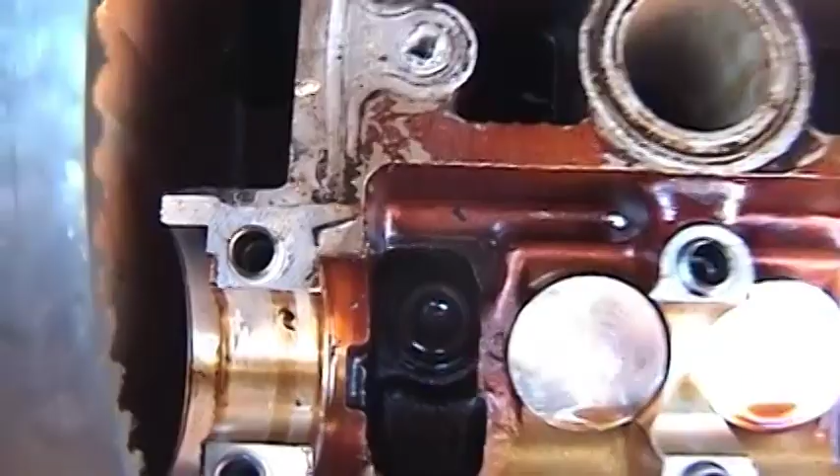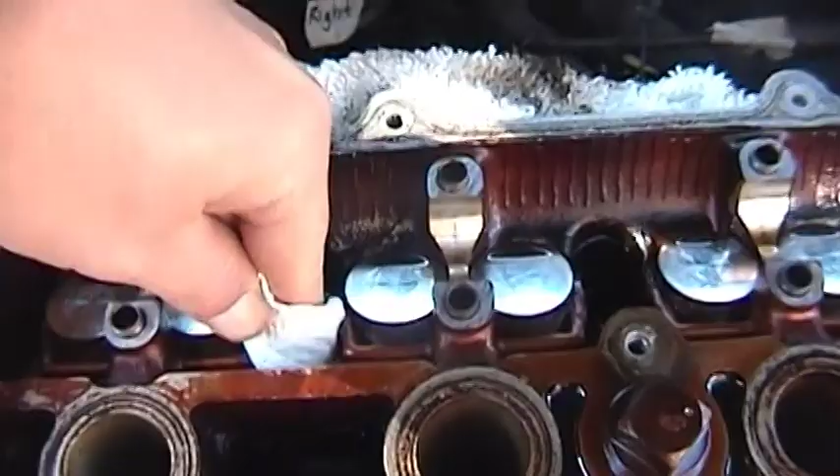Now before you remove your head bolts, which are these in between the HLAs, there's 10 of them, 1, 2, 3, 4, 5 per side, or per camshaft. What you want to do is clean those up because there's going to be oil inside of those hex heads. So take a paper towel, stuff it down in there the best you can. It's kind of like you're cleaning out your ears or something like that.

Once you get the heads cleaned off, then you go and use your marker and you make a straight line so that it's marked in a single direction. So I would recommend marking all of them down, down, down, down. And the same with your HLAs. You want to mark your HLAs as well, because you're supposed to put your head bolts and your HLAs back in the same exact place.

So let's do that. If you haven't already set top dead center, it's not really going to make a big difference if you're doing a head removal versus a timing belt replacement. The same procedure for the head removal can be followed for a head gasket replacement. It's the same thing. You're removing the head, so all of the procedures are the same. But it's a little bit different for the timing belt. Probably the divergent path would be getting at the crank pulley, because you need that crank pulley really in order to set top dead center.

We will have to set top dead center, but that's in the reassembly process. For the disassembly process, you really don't need to worry about that, because once the head is removed, you'll see the piston and you'll know exactly where top dead center is regardless. So that's something you can worry about later.

So I would recommend leaving the spark plugs in as long as possible, just so that you avoid contamination of the combustion chamber. You can do that after your fluids are drained and your camshafts are removed. So right now would be a good time, right before you're about to start on the head bolts, to remove those, because once you untension those head bolts, the head might have a tendency to come up a little bit, and if your spark plugs are still in the wells, then your spark plugs could get stuck, and that would be bad. So remove your spark plugs first, then go at the head bolts.

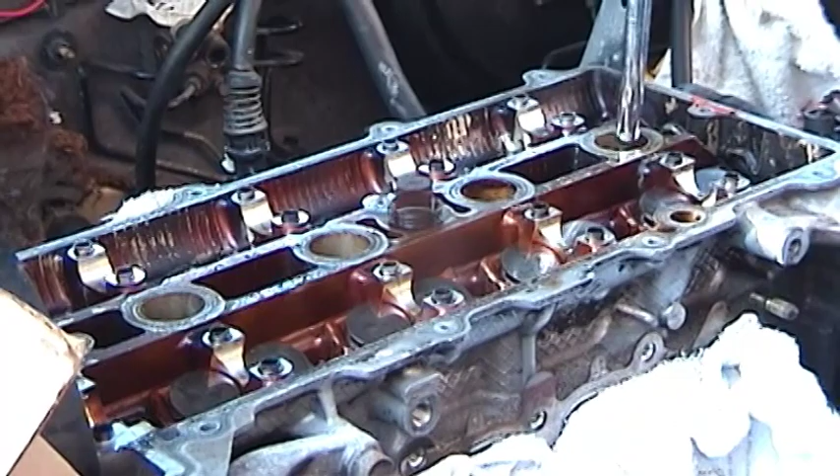There will be some oil deposit on the end of these HLAs, just a little bit. But if you want to mark those, you will need to clean them up. And be careful not to clean too much oil out of here, because you need that to keep it lubricated. Otherwise your parts are going to start rusting, and you do not want rust in your internals. No siree.

Let's hope this works.

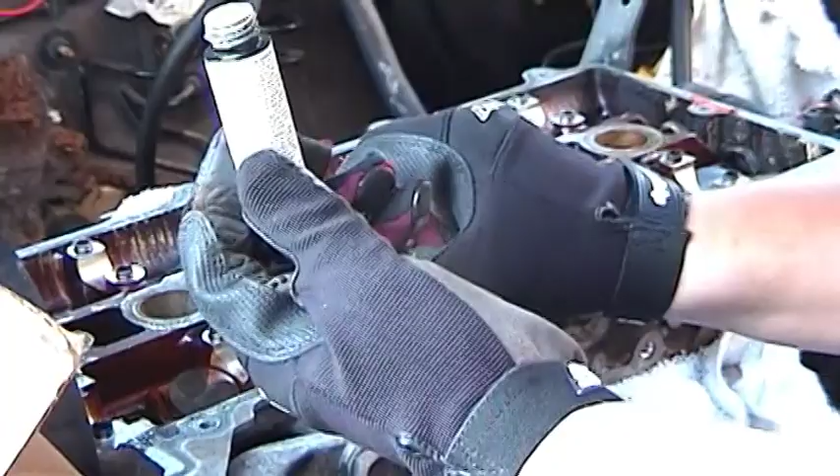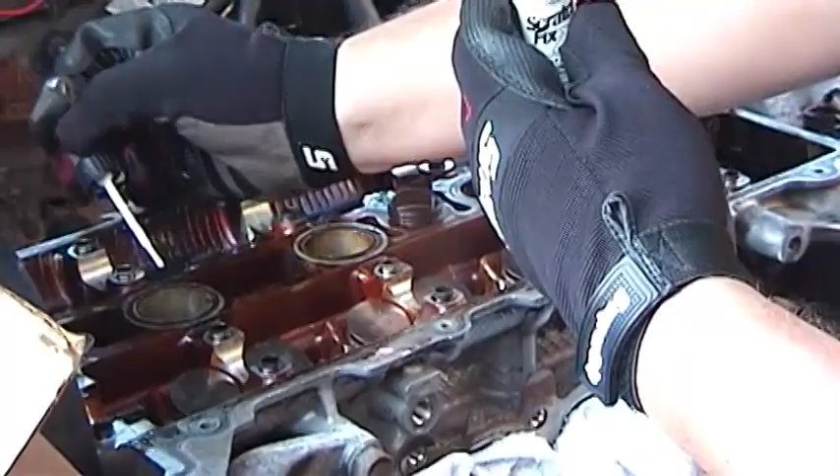I have marked all of my HLAs on the bottom. They all face the same direction, and the same for the top. That way they're just easier to see from this side. And the same with the head bolts, although the head bolts are covered with oil, so it's harder to see. But as long as there's a tiny little bit of that left after I'm done, should be okay.

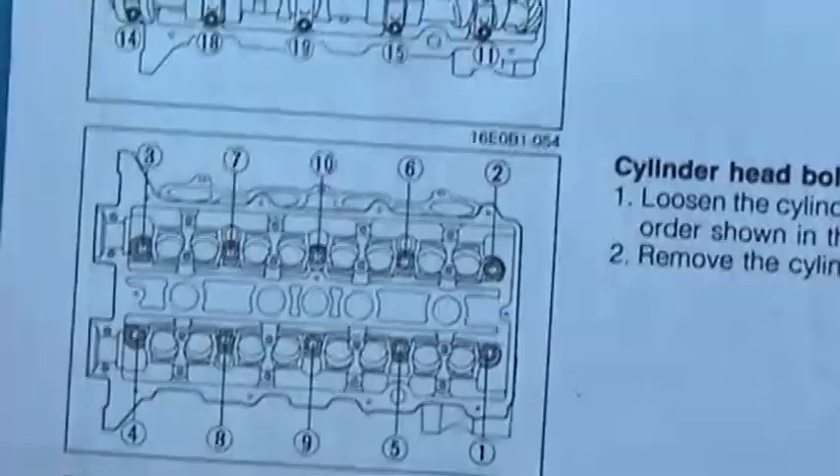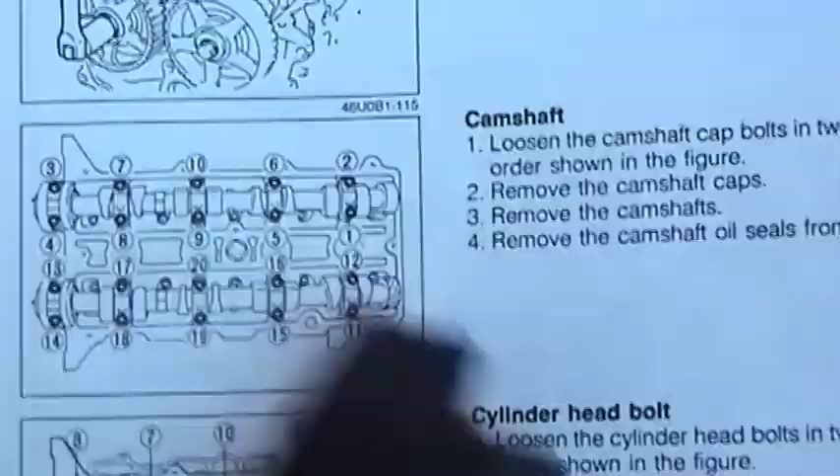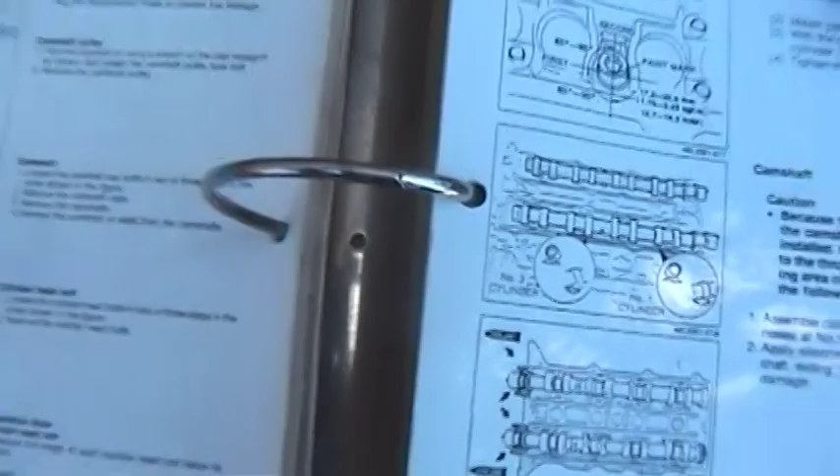Alright, I want you to see something confusing that I came across. Cylinder head bolts. Here's the pattern location, or the loosening sequence. It's the same as the camshaft sequence, which is a spiral going inward. Same spiral, 1, 2, 3, 4, 5, 6, 7, 8, 9, 10. And then there's a different sequence on the next page that continues with the cylinder head bolts. Oh, that's for loosening, and that's for tightening. Duh. Okay, so I was wrong.

The head bolt sequence that I described in part 4 of the head removal series was incorrect. It is the same exact sequence as the camshafts. Now there's 10 bolts in total. 1, 2, 3, 4, 5, 6, 7, 8, 9, 10. Same exact process as the camshafts.

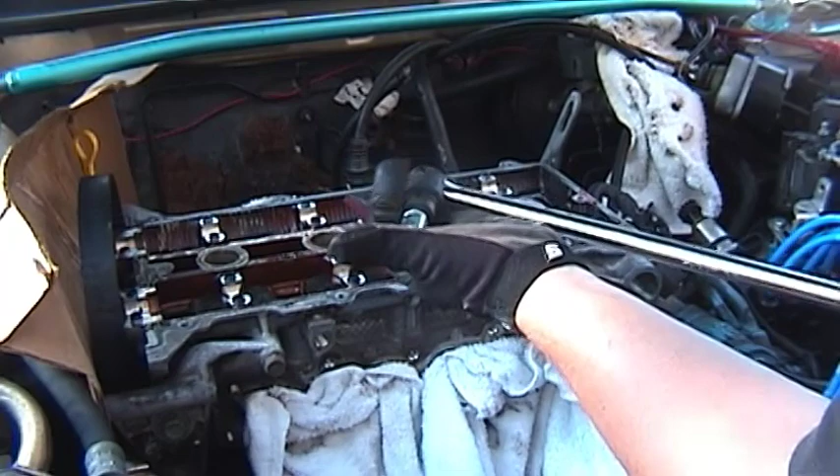And I picked up a 1/2 inch breaker bar with a 1/2 inch socket set. Big mamma jamma. And this is the guy that's going to help me get these head bolts off. I think I could probably do it with the 3/8 inch breaker. You can reuse the head bolts if they're within spec. Go onto the website, get the specs.

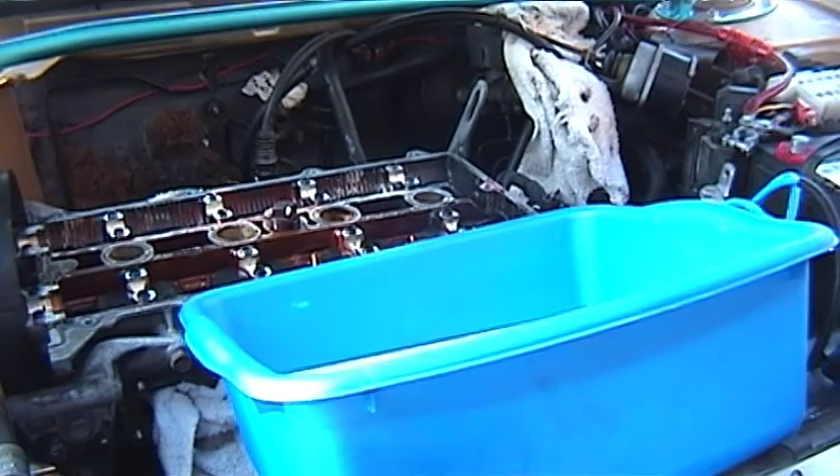There's a specific length because these head bolts will stretch. Lengthwise, they will stretch. So as long as they're not stretched past the maximum spec, you can reuse your head bolts. Now, you do this on an individual basis: if one bolt is stretched too far out of spec, and you'll need a caliper or a micrometer to measure that, then you would have to just replace the one bolt. I know that would suck, but you know, keep it within spec. Okay, so when I take the HLAs out, I'm going to put them into a tub here.

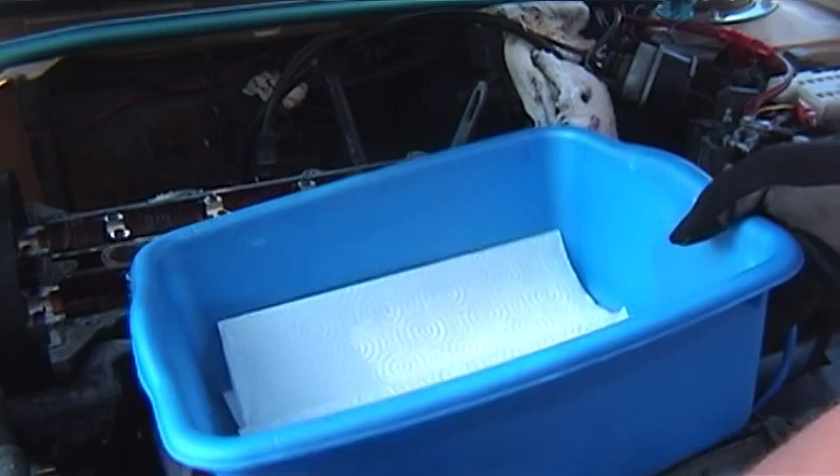And the nice thing about having these aligned in a tub in the correct order, take every single one out and put it in the correct order, is that you can then fill this tub up with oil to keep them, because you're not supposed to store these dry, you're supposed to store your HLAs wet. So then I will take some motor oil, just enough to coat it, and pour the motor oil in here. For the time being, I'm going to take the paper towels just to set them in here, but when I fill this with motor oil, I will take the paper towels out.

In order to remove your HLAs, all you need is a little magnet. I have this telescopic magnet that I got from an auto parts store for, I think it was like $5 or $6, something like that. This thing is so awesome. I highly recommend everyone get one of these. I love this thing. If you drop a part, you can go all the way down. I can touch the ground with this through the engine bay. If you can see it, you can get it with one of these.

In order to get out your HLAs, all you need is a magnet. Just pop it right on there. And look at that, it comes right out. Now, if only everything else in the engine bay was this easy. I will probably do another separate video on inspecting the HLAs and making sure that those work correctly, how to possibly repair them, and stuff like that. So that should be neat.

And below the HLAs are your valve springs, valve spring retainers, and valve guides, and valves. It's all valve related because those are your valves. Those are the guys that go up and down so your engine can get air and expel it.

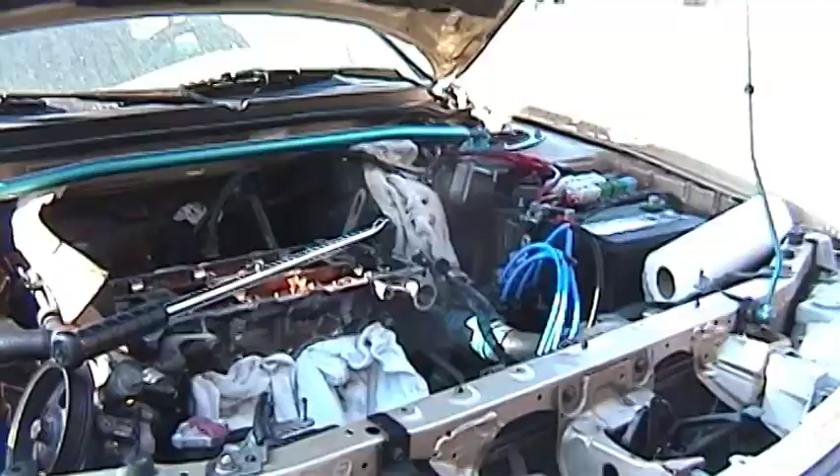Okay, moment of truth. That's about right. That's about what it felt like. I think you're only supposed to go about a quarter turn at a time. Could be wrong, could be right.

Honestly don't know tonight. I don't know how that song goes.

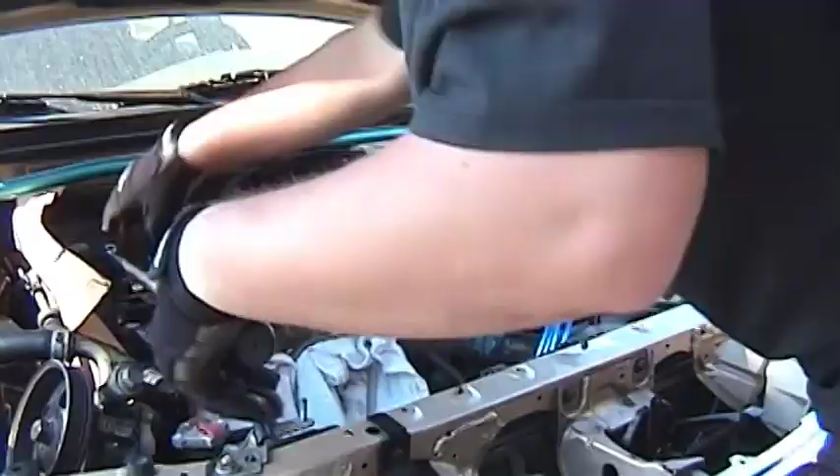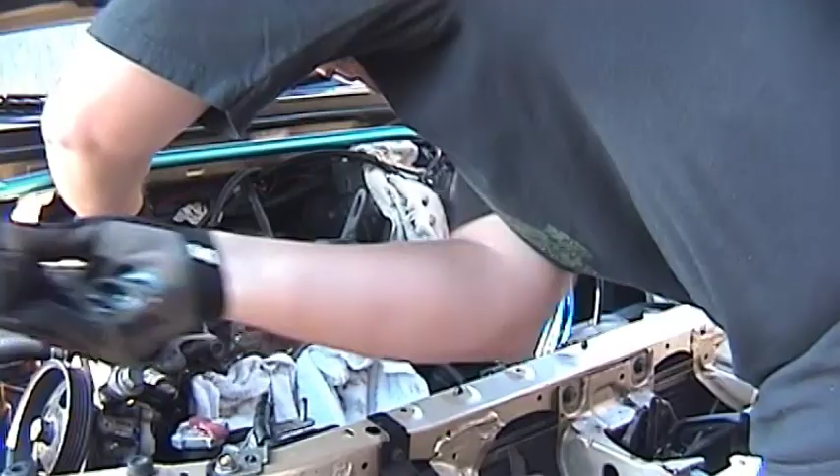It's actually not too bad. I thought it was going to be a lot more torque than that. I thought it was going to be something crazy like, you know, 50 or 60 pounds, but it's only 15 pounds. I can do that with one hand, left-handed.

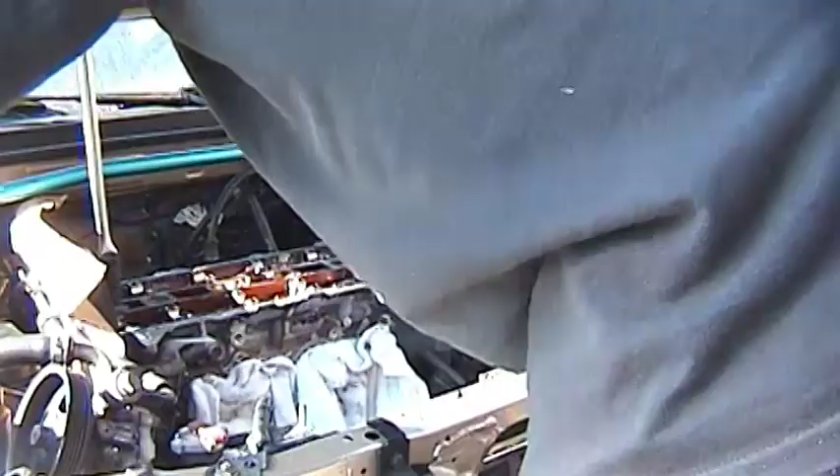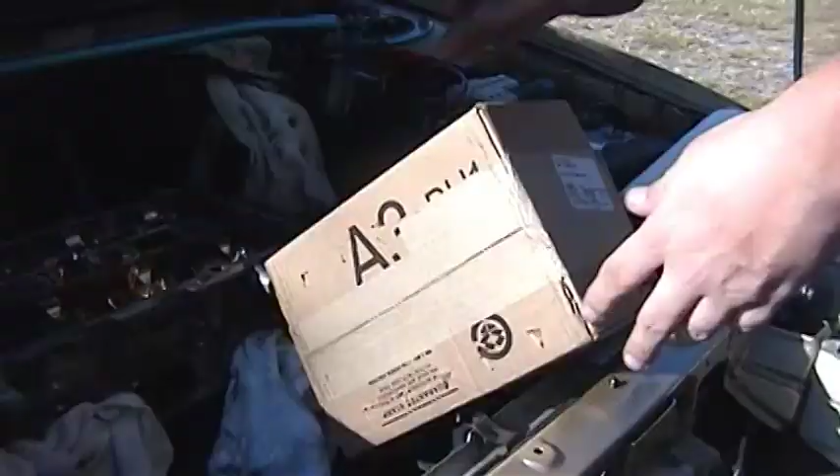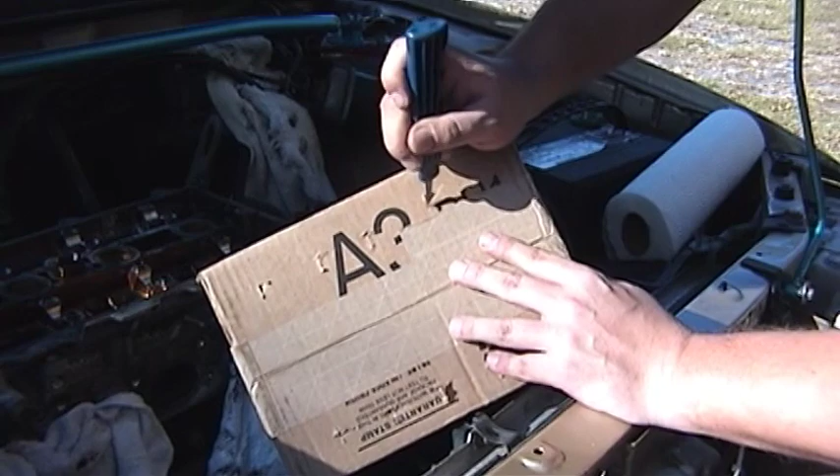Okay, after you do your series of 3 loosening sequences, I mean, you could probably do 2, but whatever, I'm doing 3. Then you can start winding off every single bolt. Got myself a little box, and there's 10 head bolts, so poke 10 holes. And I'm just doing the last two to demonstrate to you how I did it. That's pretty easy stuff, but whatever, why not, right?

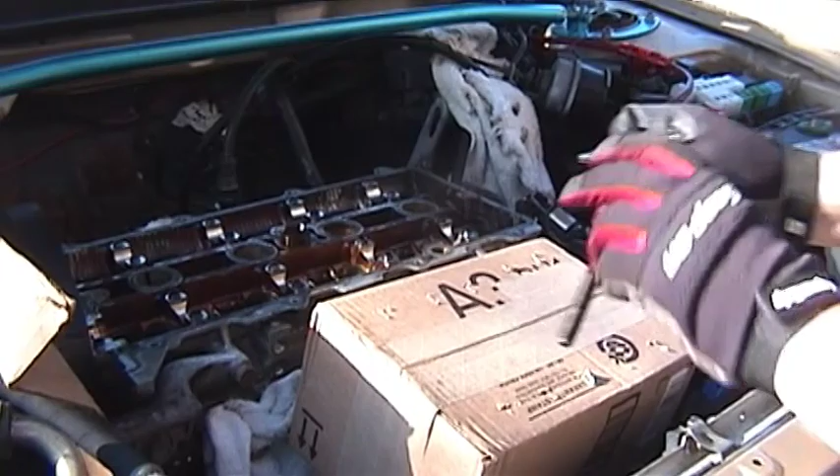Right. Get your telescopic magnet again. That's a head bolt, ladies and gentlemen. It's a pretty big guy. I'm not even sure if the hole I made for this box is going to be... Yeah, that works. Okay, the nice thing about using a telescopic magnet, after you've loosened them all up, is if one is just a little bit stuck, then you can use the magnet to rotate it out, because these are coated with oil, so they are really slick, and the magnet will actually be able to pull it out the rest of the way. So, double use. Good stuff.

Alright, ladies and gentlemen, the moment of truth. I'm pretty sure I got it. After the head bolts, that's it. That's all that holds the head to the block. Right under this exhaust manifold gasket is a separation line. This is the start of the head right here. So if you follow this all the way around and there's nothing else connecting to it, then you should be good.

Look at that. It's not stuck down at all. You can raise it right up with your hands. Don't need a crowbar. It just comes loose right there. So as soon as I take this off, all the oil sitting in here is probably going to come out. I'm pretty sure there's no coolant in here, so just make sure you got some rags handy. You can take all your manifold rags out now and just save these as catch rags in case there's any spills.

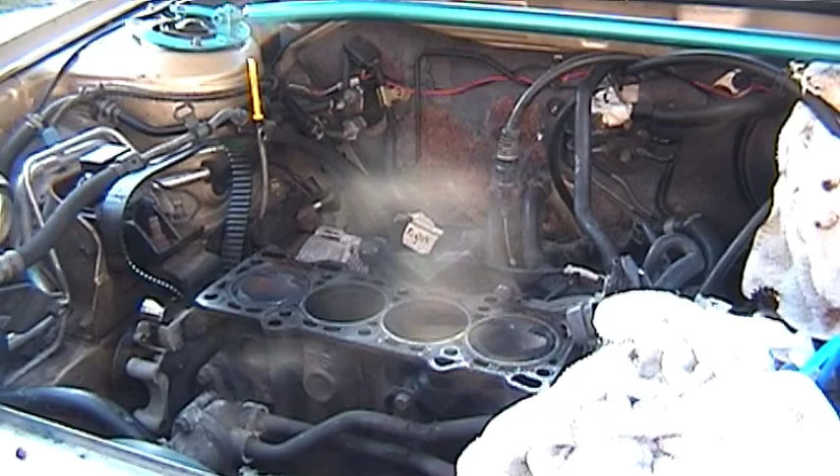There you go. Hey, look at that. Top dead center. Looks like I got it. I know the lighting is not that great. My apologies. This is cylinder 1, top dead center. Some bronzing there. It's not too bad looking. I'm pretty sure that's a 15-year-old piston. I've never, to my knowledge, had the head gasket replaced. So this is also an original head gasket, and the head gasket looks really good.

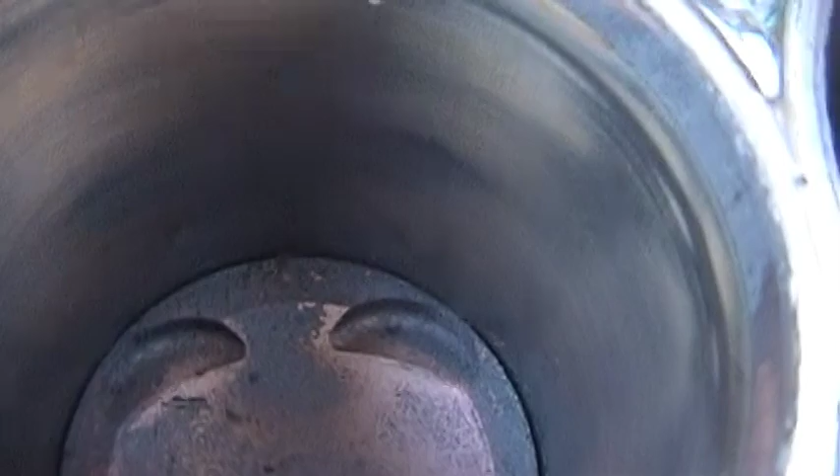Cylinder 2. A little bit of crud in there. Not too bad. I'm gonna have to take a look at the cylinder because I can't really see that good in there, but it looks like there's a lot of scoring. I'm not happy with how that looks. And if I were you, I wouldn't be happy with how those cylinder walls look. That does not look good.

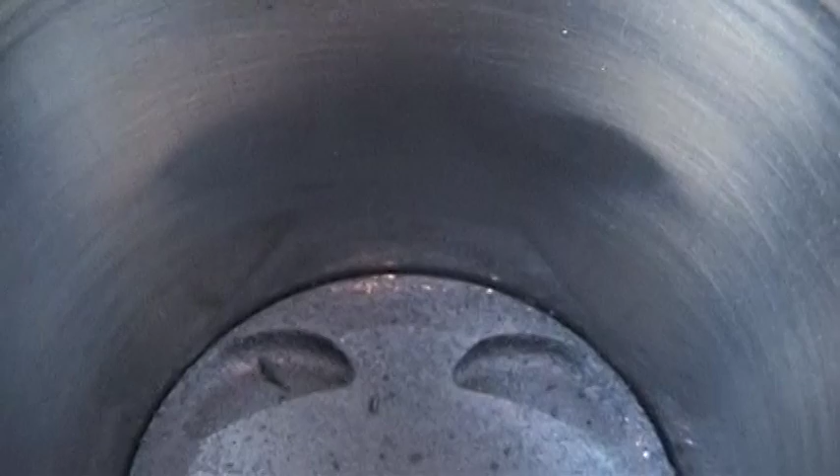Cylinder 3. This is the bad cylinder with the bad intake valve supposedly. I still have to flip it over, but that does look like a pretty bad cylinder. It might be the worst cylinder gunk of all the cylinders.

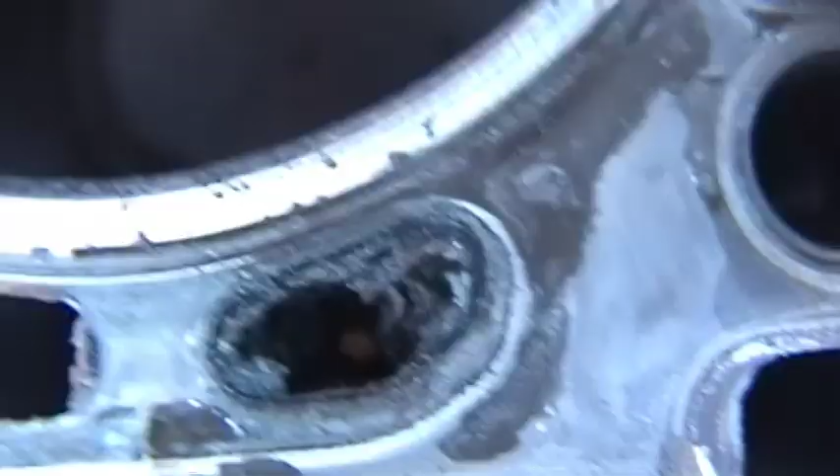That is a coolant jacket, obviously, but everything looks good except I don't think that looks good. Should look like that. And that's on the exhaust side. I don't know if that makes sense, if the intake valve is messed up, for the exhaust coolant jacket to be gunked up like that, but it's the same for cylinder 4. But the head gasket is in great shape. I mean, that is a beautiful looking head gasket.

Actually, that's a block issue. So I'm not sure what I'm going to do about that. I'm going to pick it out the best I can. But if that becomes a bigger problem, I'm going to drop the pan anyway to replace the pan gasket. So I'll take a look from underneath. Yeah.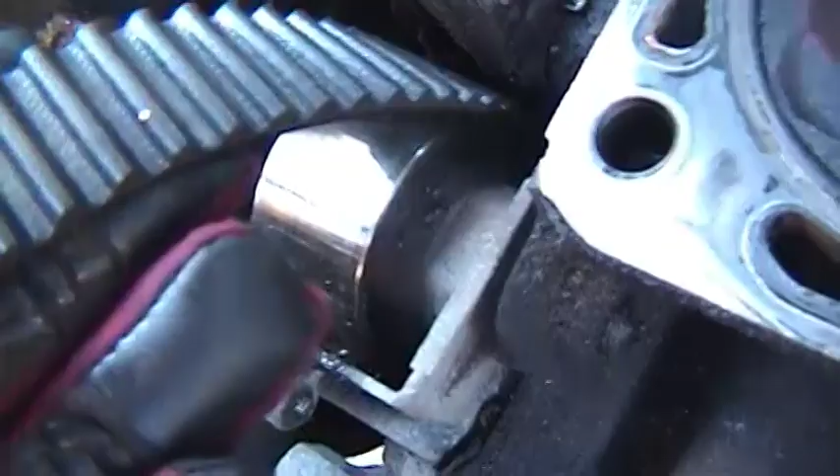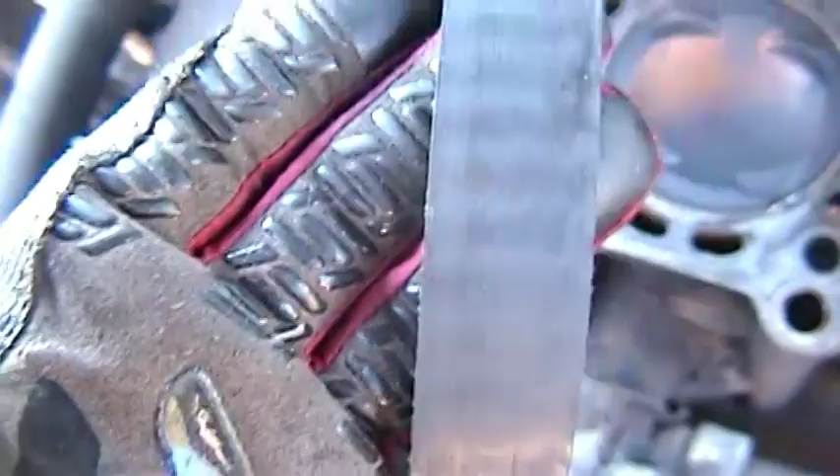Here's how the timing belt looks. It's not too bad. I really don't see a problem there. I think that looks pretty good. Other than the striations from the top, which I imagine are from the tensioner, because the tensioner looks kind of worn. It's got a lot of banding, which I imagine is about right, par for the course.

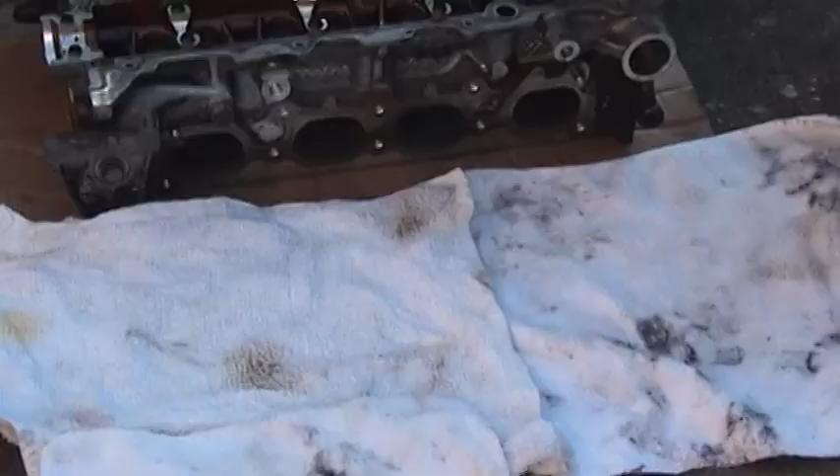So next up, we're going to get a look at the underside of the head. Now the oil's going to run out of here too. I don't know where these grommets are falling out of. Here's the other side of the head. This is cylinder number 3. This is intake, exhaust, exhaust.

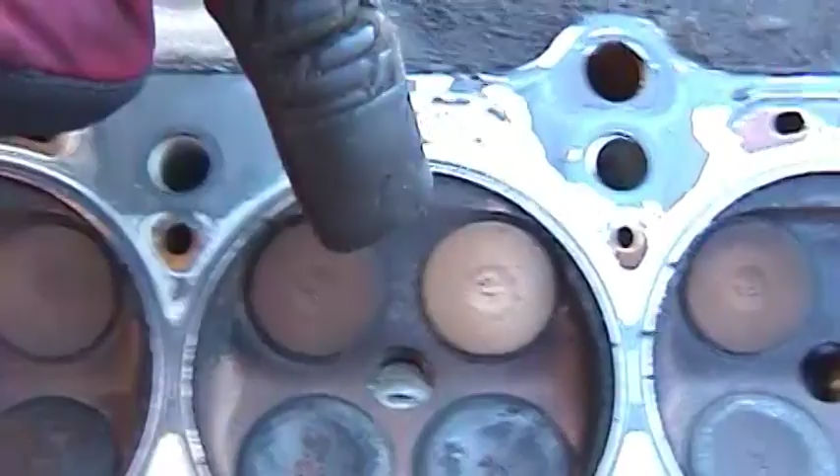As you can see, the intake, this particular one, is white compared to all the others. And the exhaust is also much more caked on burnt than all the others. So cylinder 3 indicates an obvious sealing problem. I have to get these valves machined. I'm taking it to the machine shop tomorrow. Hopefully we can get this done.

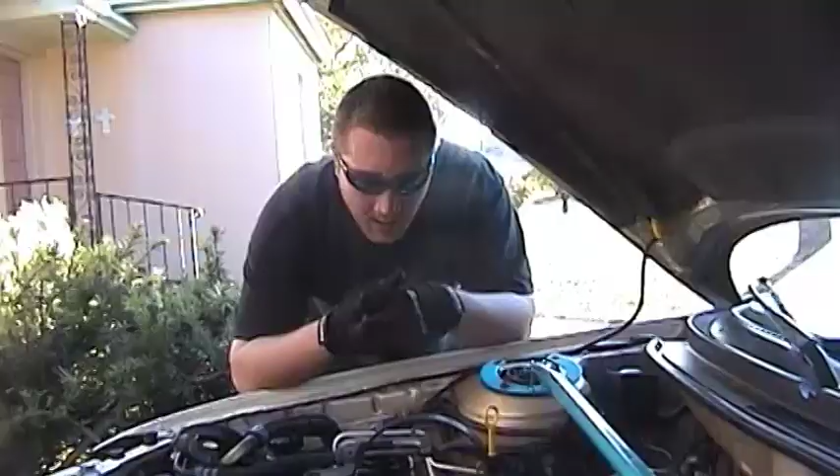If you want to remove the head, either for a head gasket or intake valve, doesn't matter, now you have step-by-step instructions on how to do that. And I hope you've enjoyed the adventure, because it was a learning experience for me. This is the first time I've done anything even remotely like this. So if it looks like I know what I'm doing, I completely don't. DIY, just a regular average guy doing it himself.

Reassembly is going to be a completely different process. You have to do torque specs, you have to make sure everything is in spec, camshafts, all the bolts, make sure all your grommets, replace seals, replace gaskets, completely different animal.